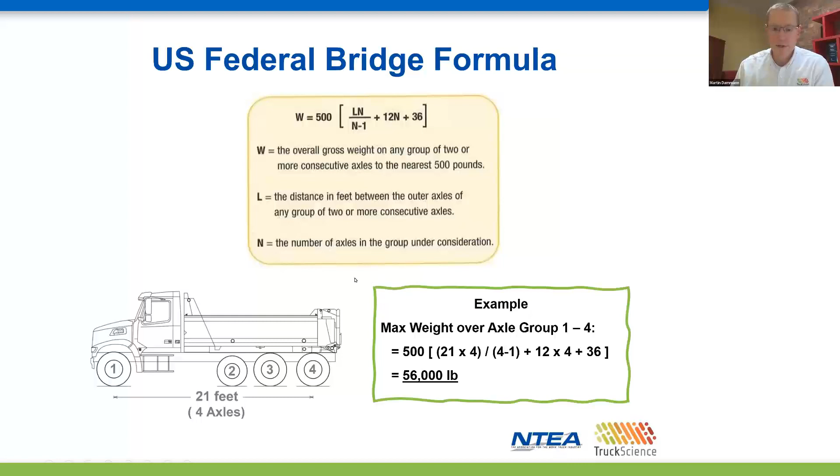Here are 2 exceptions to the bridge formula. Single axles are limited to 20,000 pounds and tandem axles to 34,000. Some states allow higher grandfathered weight limits on their state roads and even on their interstate highway system. We'll show you some examples of this for the states of Georgia and South Carolina later on.

The bridge laws are summarized into what's known as the bridge table. This table combines the bridge formula and most of the exceptions into a simple lookup matrix. If we take our previous example of 4 axles spread over 21 feet, we get that same limit of 56,000 pounds without having to do the calculations.

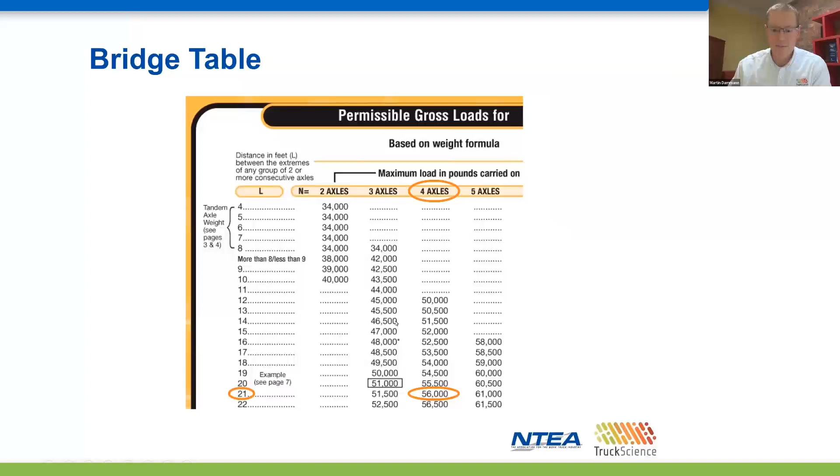To demonstrate the process of modifying a vehicle, we'll take you through a live demo using our axle weight calculator. We'll start with a 6x4 chassis and a 16-foot dump body. Then we'll add a pusher axle and compare the overall carrying capacity. Next, we'll extend the wheelbase by 3 feet to demonstrate how distance affects overall bridge carrying capacity. And finally, we'll add a second pusher and a longer body to optimize the configuration. Let's switch to the live demo now.

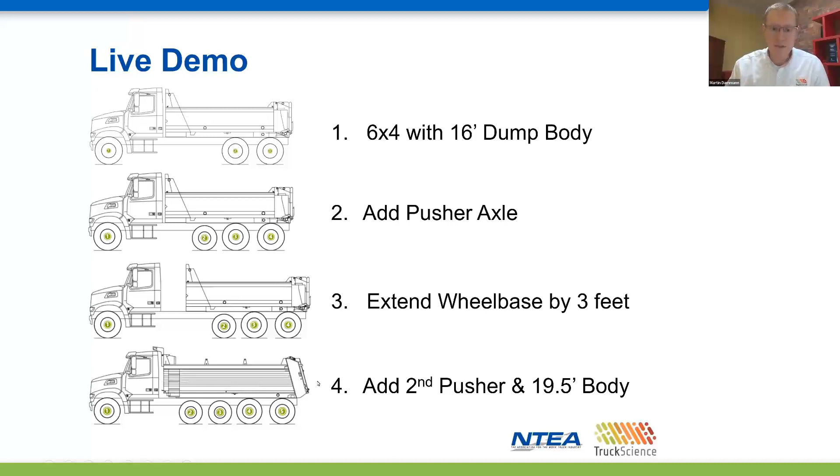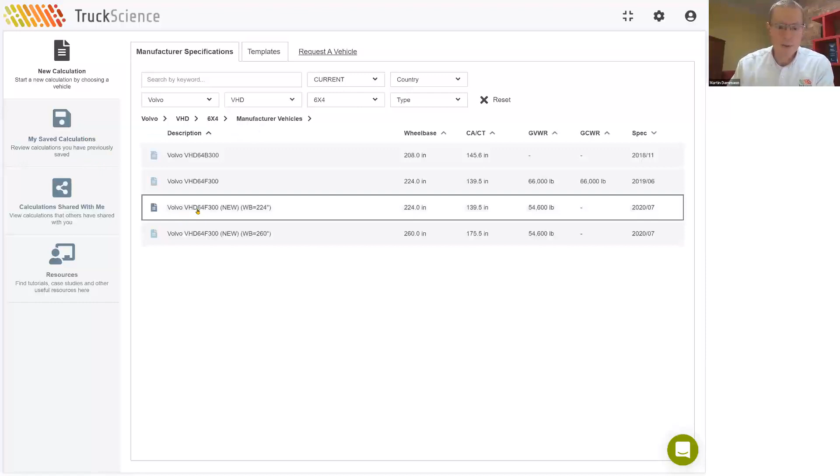In the previous webinar of this series, we focused on sourcing the information to do a weight distribution. Today, we'll take advantage of the vehicles that are already in our library, and we'll select a Volvo VHD 6x4, and we'll choose the one with the set forward axle and the 224-inch wheelbase. The vehicle will open with the graphic and the dimensions and also the weights as per the proposal document from the dealer.

Note that we also show a dashboard to the left here, where we highlight our 3 pillars of compliance, namely manufacturer rating, regulatory compliance, and organization standards. So we validate the calculation against these 3 compliance options here. There's even an area here to display some favorite measurements, and we'll have a look at the dashboard from time to time as we go through the calculation.

Let's just drill down on the regulatory compliance. You'll see that we are validating this calculation against the US federal common size and weight regulations. These regulations contain the bridge formula that we've just discussed, and also the common dimension limits that are applied in most states.

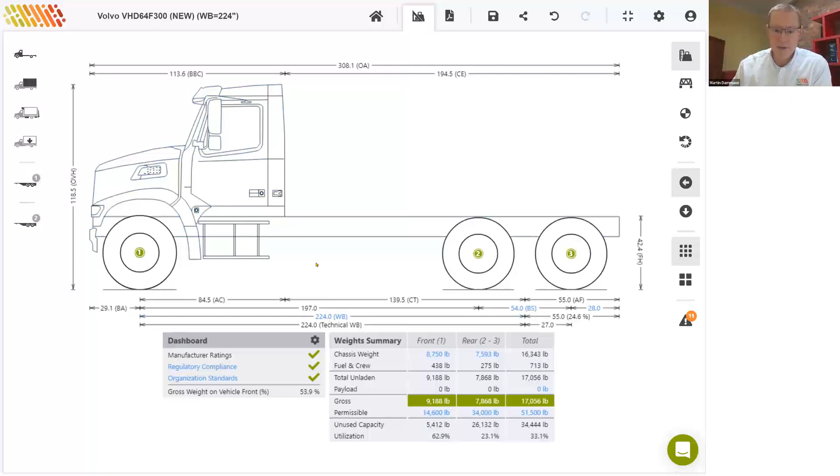Now, before adding the body to our vehicle, it's always a good idea to check some attributes of the vehicle, especially with a Class 8 vehicle, as the manufacturers offer these vehicles with many different wheelbase options and also a lot of different axle options. So we can start off by changing any dimensions that are highlighted in blue, for example, the wheelbase. So if we wanted to override the wheelbase, we could increase it or decrease it to whichever wheelbase we need.

And then in the weights table, we can click on, for example, chassis weight front axle and override that, increase that if we wanted to. If we deselect the override, the value will return to the original default value. You can also change the gross axle weight rating here.

So that depends on the choice of axle. The same applies to the rear axle. Jens, do you have a question there?

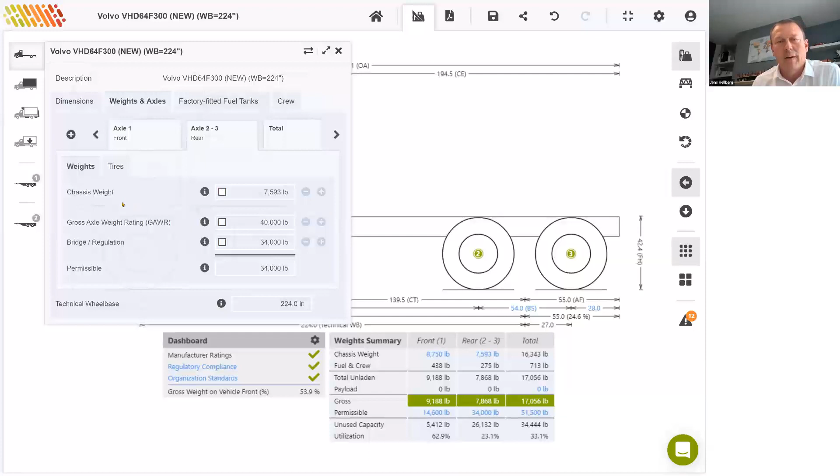Yeah, Martin, just while you're on the front and the rear axle limits, a question came through there: how are weight distributions regulated in terms of max weight on front axle or rear axle? So I suppose maybe if you can just explain a bit more about the GAWR and the bridge. I suppose you've maybe partially answered that question already, but yeah, sure.

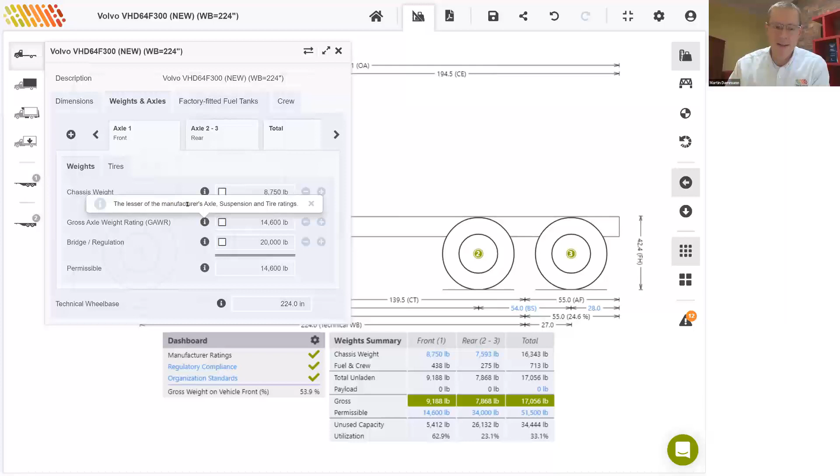Maybe I'll just go back to our front axle here. So we validate. Okay, we'll actually get to that in more detail as soon as we add the body. But I might just go back to the gross axle weight rating. So we have an information icon here to explain what that is. So that's the lesser of manufacturer's axle, suspension, and tire rating.

And then we also have the bridge limit here of 20,000. So for the axle, we have those two items that we compare. And the lesser of these two, that's the manufacturer rating and the bridge limit, becomes the overall permissible. But I'll keep coming back to the validation as we go through the calculation.

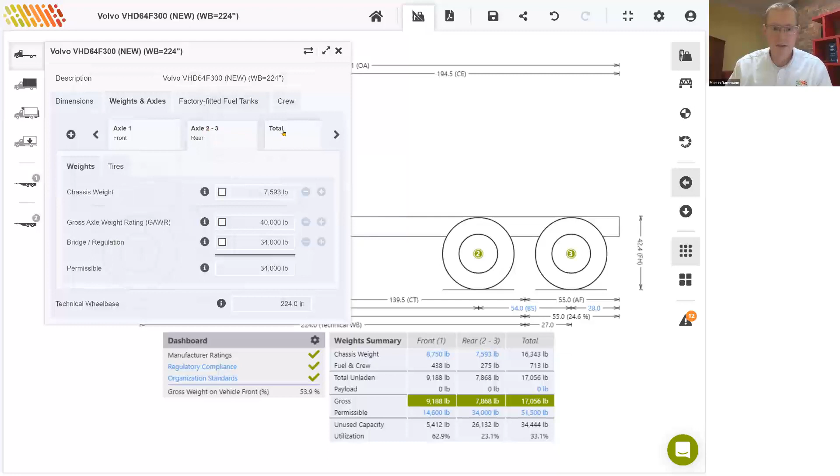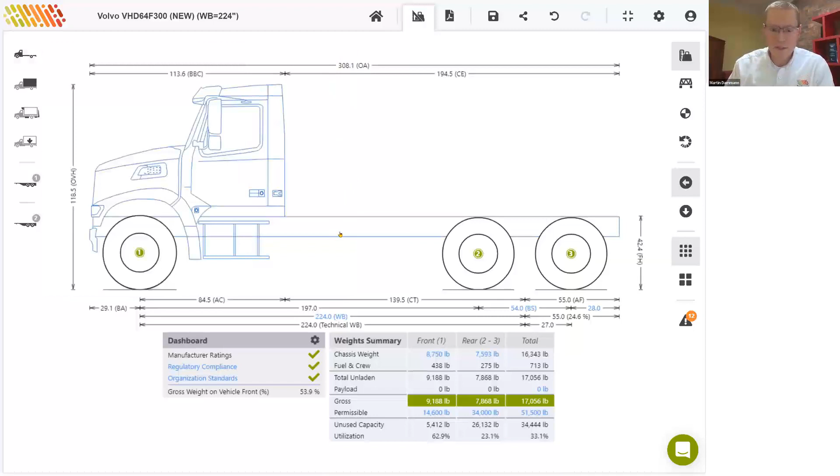Okay, so we can obviously update any of these values on the rear axle as well. And don't forget to change the gross vehicle weight rating under total if you need to make a change there. Let's close that for now. Once the vehicle is set up, we can add the body. We'll do this from the body menu on the left.

These are the different body types that we cater for. For our example, we'll use a dump body. There are different ways in which you can add a body. You can choose it from the public library, or you can use a template to add a generic graphic of a body, which you can then alter to suit your requirement. You can even use the DXF import feature. In the previous webinar, we already demonstrated that DXF import feature.

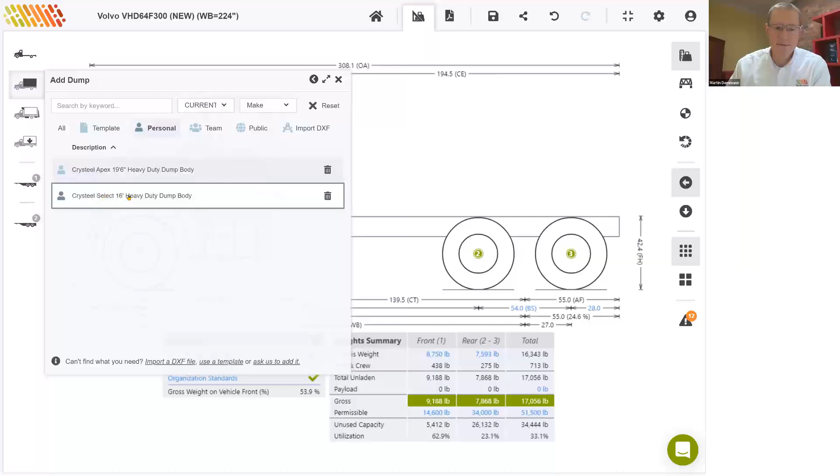So for today, I've actually saved two bodies to my personal library using the DXF import feature. And we'll start with the Crysteel 16-foot body. Okay, we'll add that to the chassis. Let's drag that back slightly to create a clearance between the back of the cab and the body. Note that the body weight of 5,500 pounds in this case does not include the hoist.

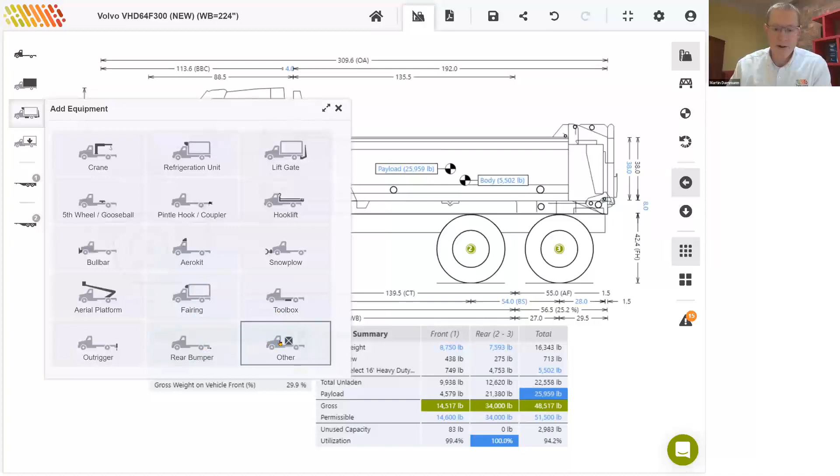To add the hoist, I'll select the equipment menu and other. So we don't have hoist as a specific category here, so anything that's not categorized will fall under other. And I've already used the template feature to add a hoist to my personal library. So I can select that and drag it into position. Let's just drag that back slightly.

All right, so now that we've got the body and the hoist on there, the software will automatically calculate the maximum payload that this vehicle can carry. So you'll see right now that's just over 23,000 pounds. That's also shown in the weights table. And the limiting factor is highlighted.

So if you look to the bottom left here under utilization, you'll notice that the front axle is utilized to 100%. So that becomes our limiting factor here. Unused capacity is 0, whereas the rear axle still has almost 2,000 pounds of unused capacity. You can, of course, change the payload if you prefer.

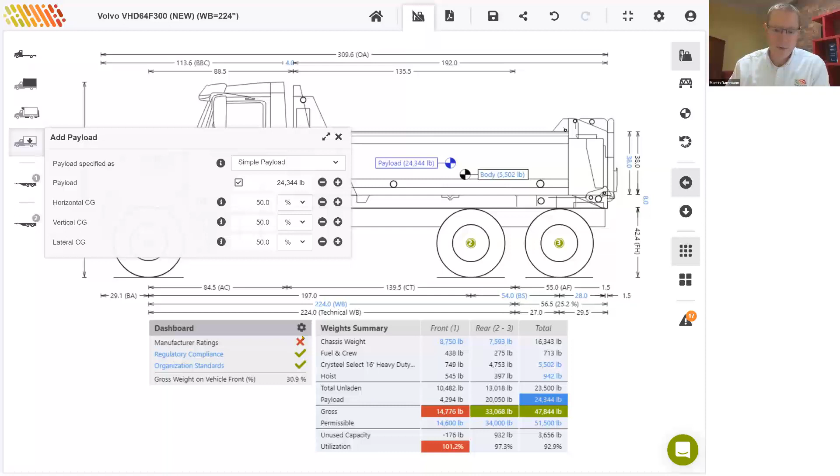So we always calculate the legal payload to give the validation all ticks on the dashboard. However, if we overrode that payload, and let's say we increase that, you'll immediately notice an overload on the front axle, and the dashboard also highlights that as an overload on manufacturer rating. So let's drill down on that again. We can drill down on this permissible here to see exactly how that is triggered.

So you'll notice that the regulatory compliance actually still has a tick, and that's because the bridge limit on the front axle is 20,000. So we're only slightly over 14,000 there, and we are exceeding the gross axle weight rating of 14,600. Okay, so that's just to explain how we do the validation. Let's close this for now, and I'll deselect the override again on the payload because we want to remain within legal, and you'll notice that we get a green tick again for manufacturer rating.

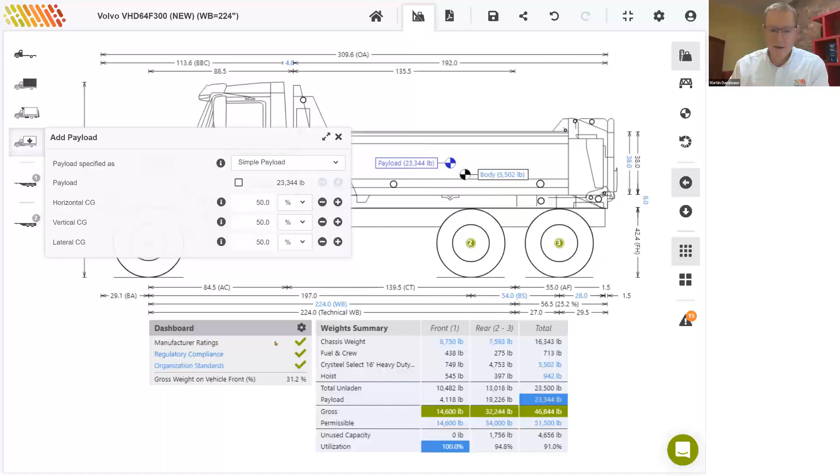Let's see if we can increase our carrying capacity slightly by moving the body back to get a better utilization of the rear axle. To do this, I'll drag the body, and just watch these numbers as I drag the body. You'll notice that the calculations happen in real time as I move the body. So I'll just drag it back slightly until the rear axle becomes the limiting factor, and we have a little bit of unused capacity on the front axle.

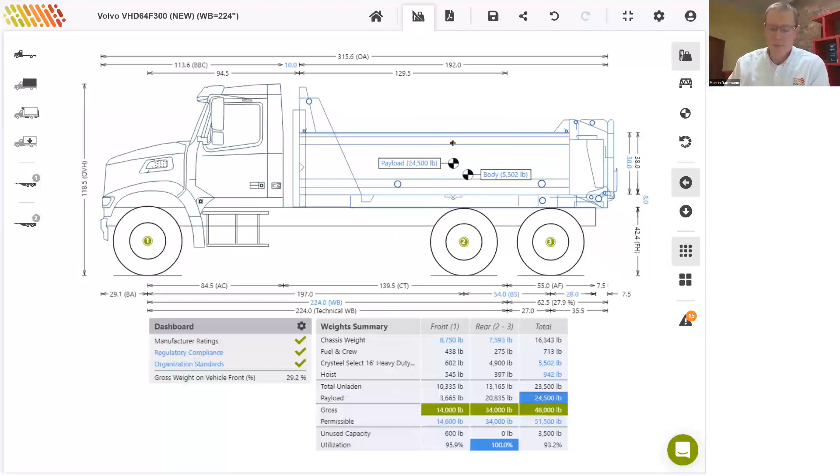So the payload has now increased by slightly over 1,000 pounds. So that's how you can optimize the body position. Let's say for this example, we prefer to keep the body to the front. So I will undo that change to move the body forward again. So at this point, we'll start the process of modifying this vehicle by adding an axle to increase the carrying capacity.

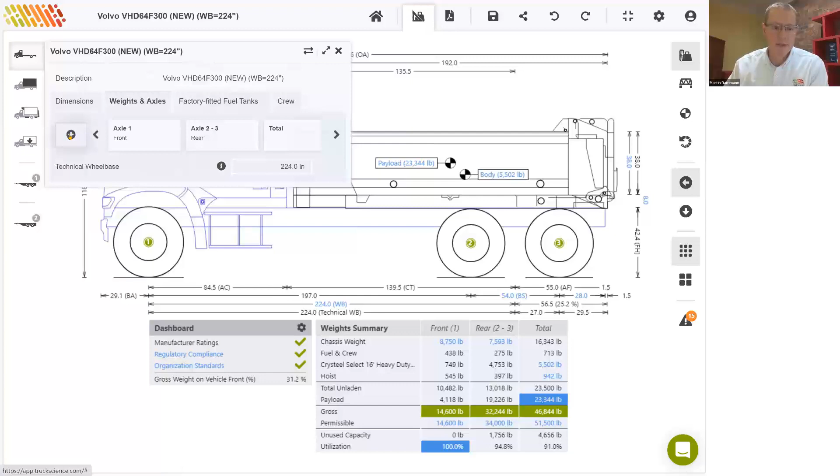Now, in cases where the front axle is the limiting factor, we recommend adding a pusher axle. If the rear axles were the limiting factor, we could add either a pusher or a tag axle. So for this example, we will add a pusher axle, and we'll do that from the vehicle menu, weights and axles. Notice the pulsing plus, and we can click on that to select a pusher axle.

The software will add the pusher axle with some default values, and you can obviously customize those. For example, you might want to change the axle spread, the weight of the axle, the gross axle weight rating, and then even the gross vehicle weight rating. Most manufacturers of Class 8 vehicles will provide a higher gross vehicle weight rating when adding axles. So we'll focus on those three areas, and I'll start off by changing the bogie spread. Let's make that 48 inches.

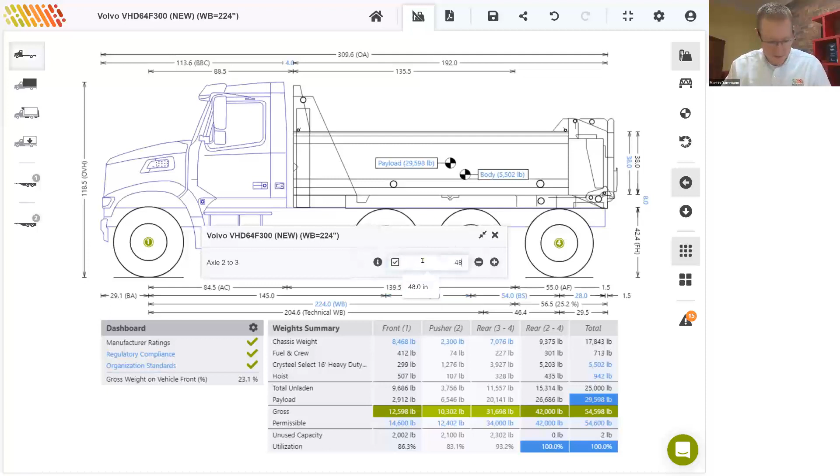And then we can select the pusher axle, actually click on that to open all the attributes that apply to the pusher. We'll start here with the weight. So we have weights, axle, and tires. Let's say the weight of that axle is 1480 pounds with suspension and tires. Then the gross axle weight rating, let's leave that at 13,000.

The bridge limit in this case is slightly over 12,400 pounds. Now you may be expecting a limit of 20,000 here for a single axle. However, this is actually limited by the tire width restriction, and I'll get back to that in a minute when we update the tire size. And then the maximum weight at the bottom, that 13,000, we use that to distribute the weight over the front and the rear. So that's quite an important attribute, and we will come back to this a little bit later.

Let's go to the next tab here for the axle, where we can see that this is a lifting axle. So we can even raise the axle. Let's just try that. If the axle is in the up position, this converts to a normal 6x4. We can drop the axle again, and all the calculations are updated for the axle in the down position. Then tires.

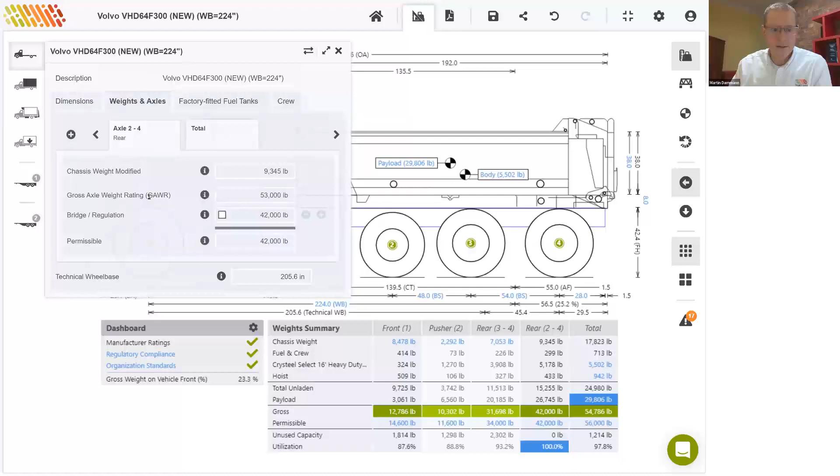The limiting factor is now the tri-axle group at the rear, which is limited to 42,000 pounds. And if we drill down on that, we'll see that the gross axle weight rating is more than sufficient. So we have 53,000 pounds there, 13 on the pusher, and in this case, 40,000 on the driven axles. So it's actually the bridge limit of 42,000 that's the limiting factor.

This will be a good opportunity to have a look at the detailed bridge view, which we have right here. The bridge view provides information for the most important bridge groups. And in this case, the tri-axle group is group 2 to 4. So if you look that up on the table here, 2 to 4, it's 102 inches is the distance. And if we go to the bridge table, 102 inches is 8.5 feet. So if we look that up here, more than 8, less than 9 feet, so it fits into that row, and 3 axles in the group. So the limit is 42,000 pounds. Okay, so that's applied there.

Just a brief overview of all the other groups. So the front axle is limited to 20,000. The pusher, which is axle 2, that we've already discussed, is limited by the tire restriction. And then the driven axles 3 to 4 are limited to 34,000 as per the federal bridge laws. And then the last one we've already discussed earlier on is limited to 56,000 pounds for the overall bridge group. Now the overall bridge group, remember we just had this earlier, we worked with 21 feet.

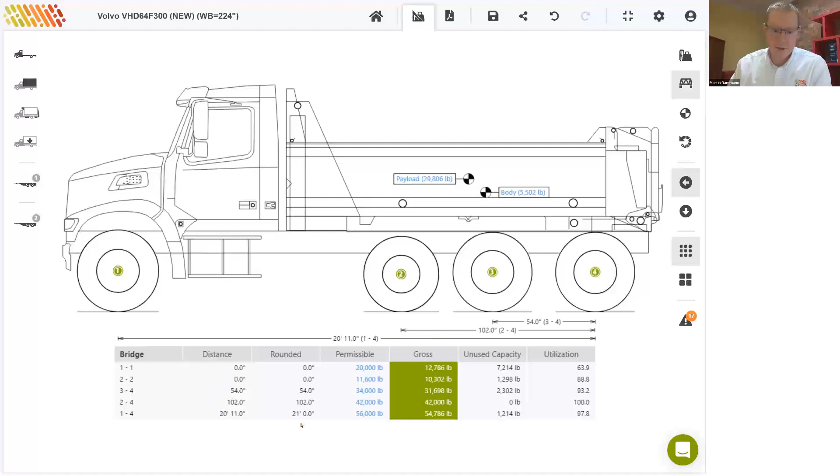The actual dimension is 20 feet and 11 inches, which we round up to the nearest foot, in this case 21 feet. So at halfway, for example, we round up, and less than halfway we round down. So if that was 20 feet and 6 inches, we'd still round that up to 21 feet. And at 20 feet and 5 inches, we'd be rounding that down to 20 feet.

Okay, so let's go back to our summary view and have a look at the detailed calculations that apply now. So what we've achieved in terms of overall bridge carrying capacity is an increase. That was initially 51,500. So that is now increased by 4,500 pounds. And we've increased the payload by about 6,000 pounds.

Now, adding pusher axles does complicate the calculation somewhat. So to have a look at how the weight is distributed over the pusher and the driven axles, we'll go back to the pusher axle and to that maximum weight of 13,000 pounds. So the way we distribute the weight is we use that 13,000 pounds in relation to the gross axle weight rating on the driven axles. And that gives us a ratio of 25 to 75. Therefore, 25% of the 42,000 on all the rear axles will be carried by the pusher and 75% by the driven axles.

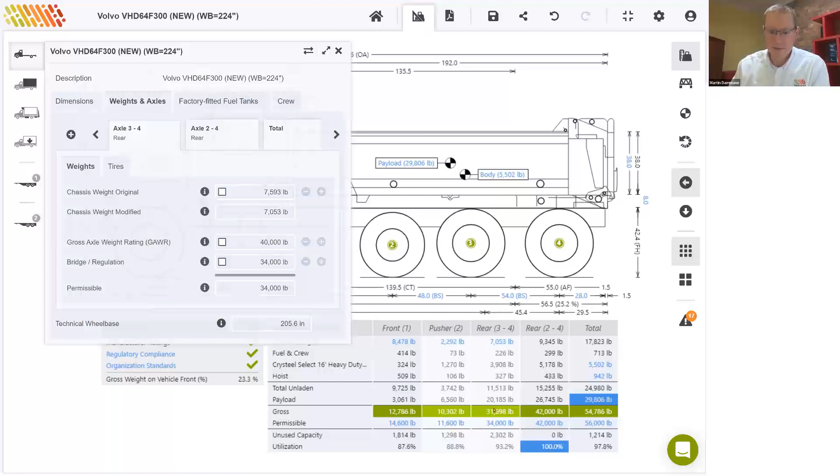We also use that ratio to calculate the new technical wheelbase. Now, the technical wheelbase is used to distribute all the weight between the front and rear axles. So that wheelbase, you'll notice, is different to the specified wheelbase. The specified wheelbase is measured to the center of the driven axles. So the technical wheelbase, in this case, is different. And we also use that technical wheelbase to then redistribute the weight of the body, the hoist, the driver, and the fuel over the front and the rear.

We even use that to recalculate the distribution of the original chassis weight. And to demonstrate this, we have a separate view, and I'll select that. Let's pick the chassis view here, where we start off with the original chassis weight in the 6x4 configuration, front and rear. We take that same weight and simply redistribute it over the front and rear using the new technical wheelbase. So the weight stays the same, it's just distributed differently.

Then we add the pusher axle and total the columns to get the modified chassis weight. Now, we have put together a few slides that show the details of all these calculations, and we'll get back to those towards the end of the presentation. For now, we'll use that modified chassis weight and return to our summary view, where that becomes the chassis weight for this calculation.

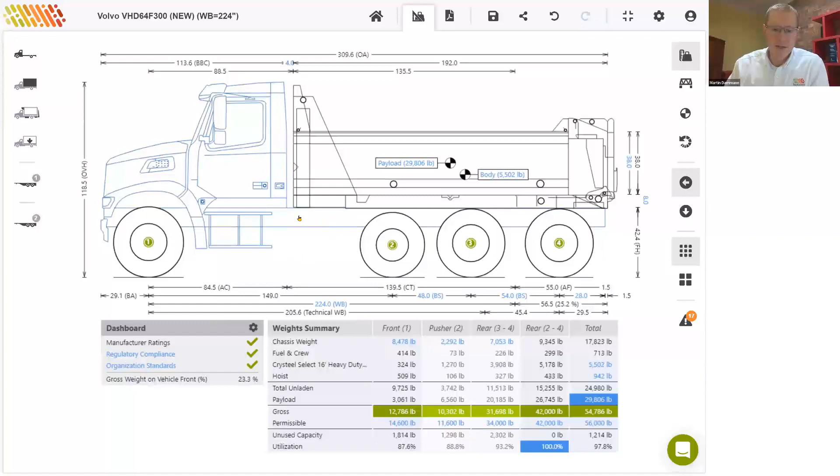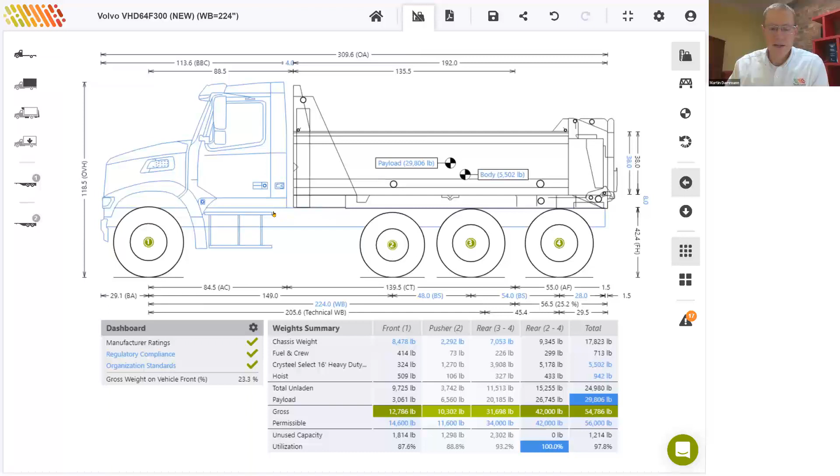All right, it may look like we can add another axle here to optimize this calculation further. So, for example, to assist the rear axle, which is the limiting factor, we could add another pusher axle. However, this space here is probably utilized by some of the vehicle's equipment. For example, the fuel tank, the DEF tank, could be even the battery box or exhaust. So that calculation needs to be done manually to ensure that there's enough space here for another axle.

To demonstrate this graphically, I will add a fuel tank using other equipment, and I'll select that from other, and I'll find a fuel tank here. I'll just search for fuel, and add a 75-gallon fuel tank. Let's drag that down to just behind the steps, just to graphically demonstrate where that fuel tank could be, so that we can see that we actually don't have enough space here for another axle.

We deliberately do not show all this equipment in the default graphic that we provide because of the many options or layout options that the manufacturers specify. So this fuel tank could be behind the steps. There are different sizes of fuel tanks. So there are too many different layouts of all this equipment for us to cover all those scenarios in the graphic that we have. But you can use other equipment, even the DXF import feature, to add as many equipment items as you like.

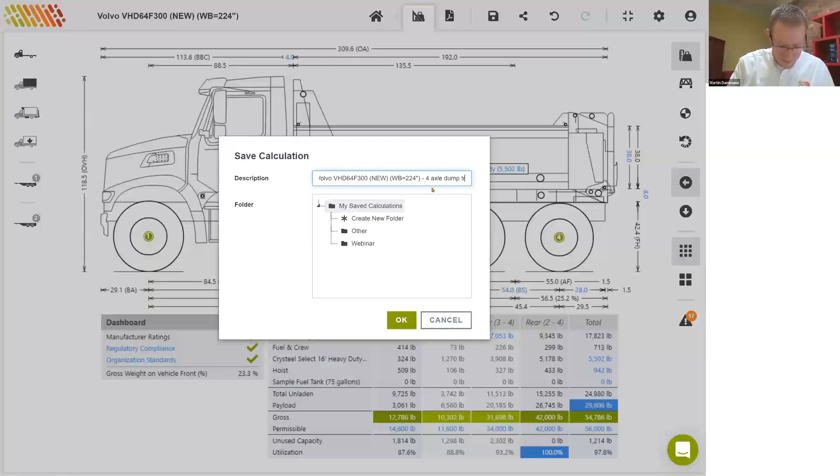All right, now it's obvious that we can't add that pusher axle and that we'd have to increase the wheelbase before we have enough chassis space here to add another axle. But before I do that, I will save this calculation. And let's save this as a 4-axle dump truck, because we'll come back to this calculation to demonstrate the state regulations.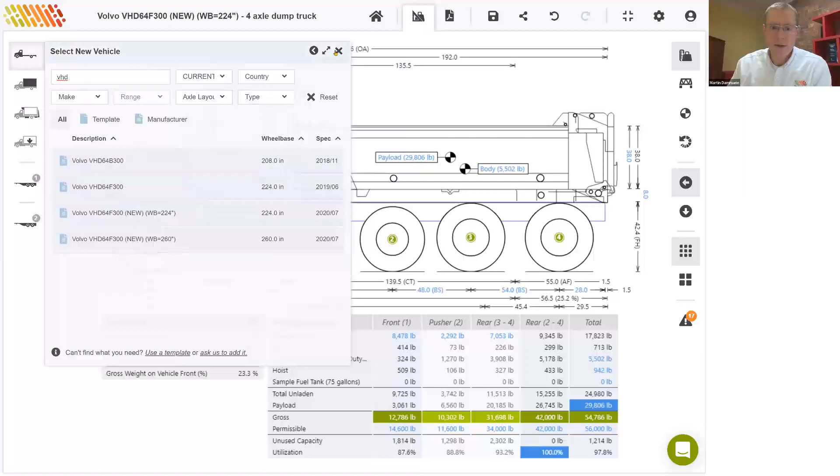All right, but for now, let's increase the wheelbase. There are two ways in which we can do that. We can either change the wheelbase manually and then update the chassis weight front and rear, or we can swap out the vehicle. So under the vehicle menu, we have a swap vehicle feature where we can search for another Volvo VHD. If we already have an option for a more suitable wheelbase in the library, you could select that. But in some cases, we will not have all the different wheelbase options in the library. So for this example, we'll do this change manually.

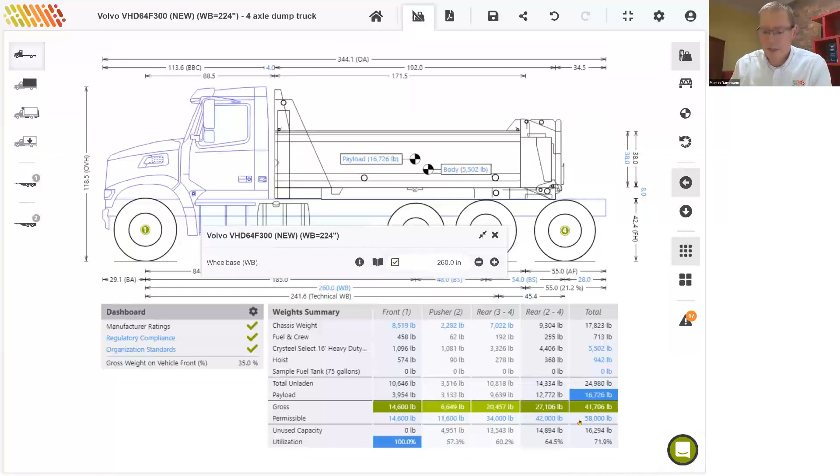So we'll start off on the wheelbase and we'll increase that by 3 feet to 260 inches. Notice as soon as I apply that change, there'll be an update here to the total or overall bridge. So the overall bridge increases from 56,000 to 58,000. So an extra 2,000 pounds for that extra distance.

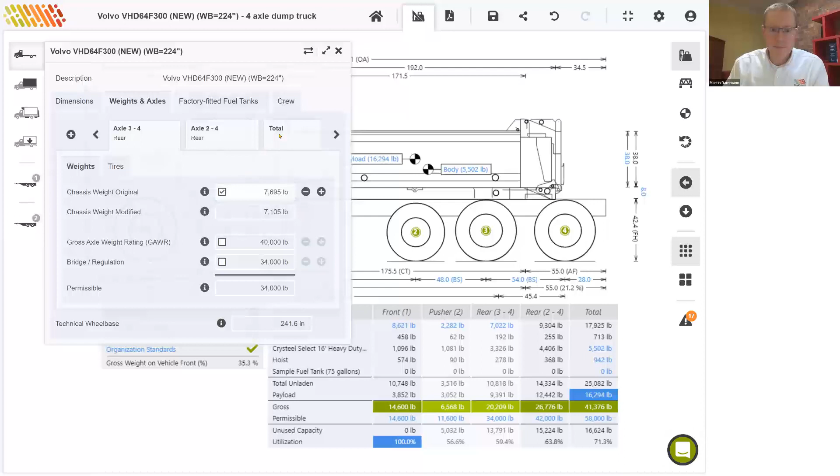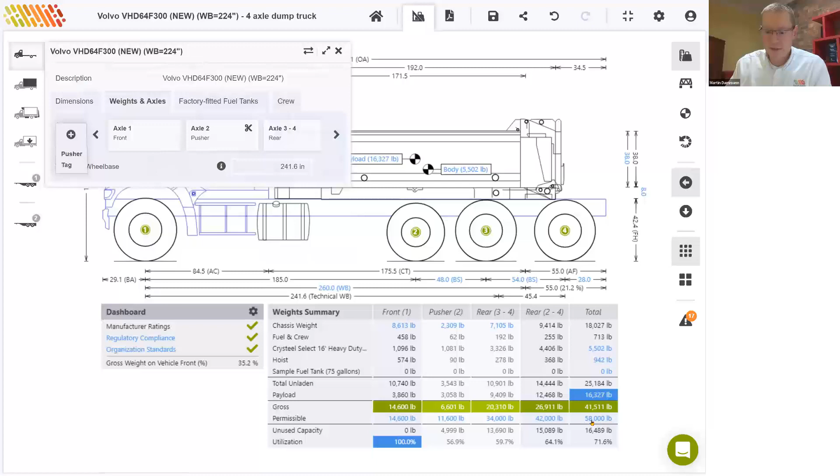Okay, now we have the space for the axle. So let's add that. And again, we'll just monitor what happens to the overall bridge carrying capacity when we add that pusher axle. So it increases from 58,000 pounds to 63,000 pounds. So that's an increase of 5,000 pounds, which is considerably more than we got out of stretching the wheelbase. So adding axles is most certainly the most effective way of increasing bridge carrying capacity.

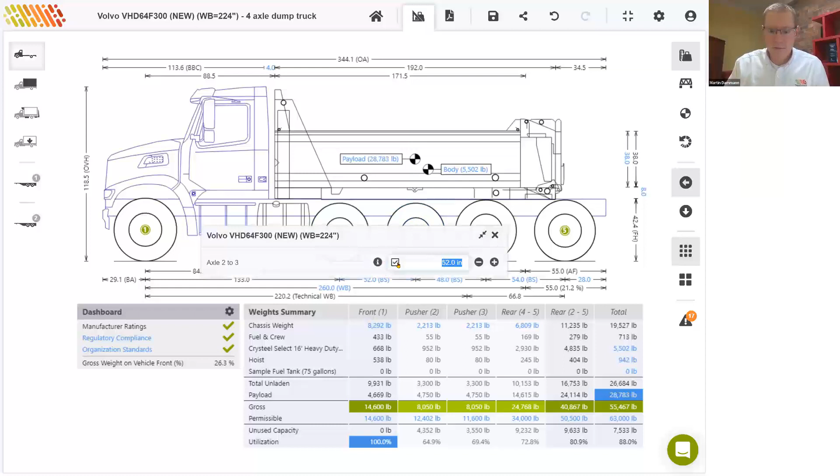We can now make the same changes to this pusher axle as we did for the first one. So we'll start off by changing the bogie spread to 48 inches, and we'll update the weight of that axle to 1480.

And we'll leave it as a lifting axle, and the tire width will also be 11.6 inches. Okay, so that applies the required changes for the second pusher. Gross vehicle weight rating: we just drill down on total again. The gross vehicle weight rating, remember, is still 67,600, which is more than the bridge limit. So there's no need to increase that any further.

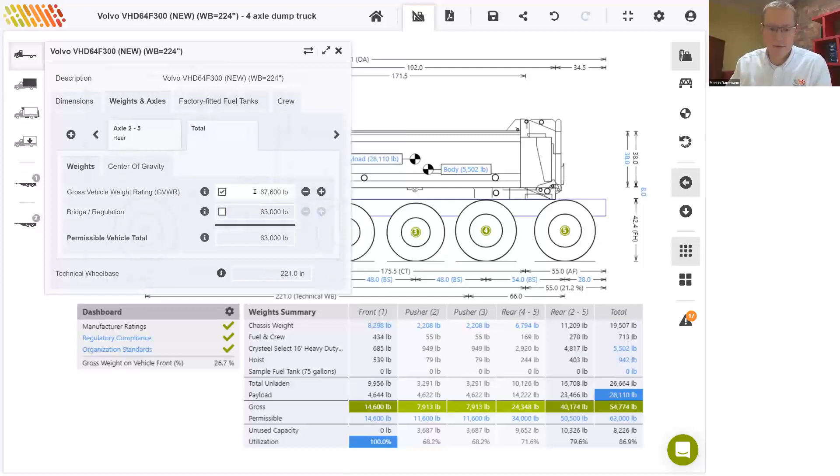Okay. We can also move the body back to make this a little bit more practical. So let me move that to the rear, and I'll drag the hoist back into position. So we can now see that the payload has increased by another 3,000 pounds, from just under 30 to almost 33,000 pounds.

What we do notice now is that we have an error on the dashboard. So our validation is currently failing on the organization standards. We drill down on that, and we'll see that the validation is failing on gross weight on vehicle front percentage. So we've set up a limit here that requires at least 20% of the total vehicle weight to be on the front axle. And in this case, it's only 15.1%.

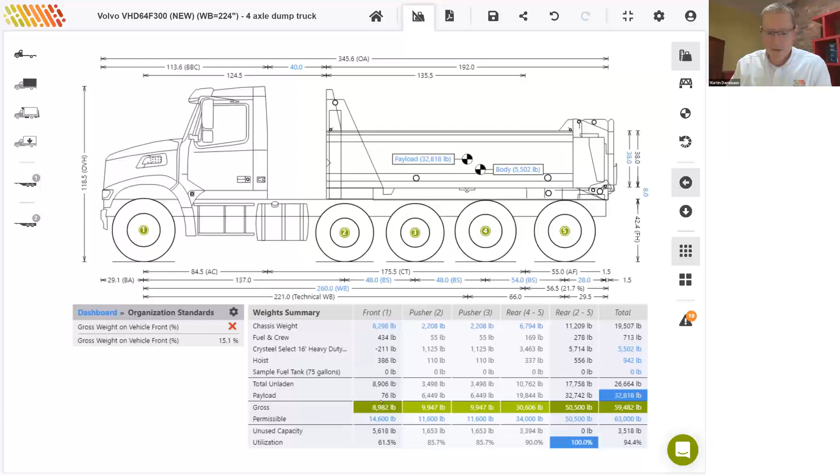We can even see that the front axle is quite light at only 9,000 pounds out of 14,600. So there's almost 6,000 pounds of unused capacity here, and that axle is only utilized to about 60%. So to correct that, we need to shift the payload further forward to get more weight onto the front axle. To do that, we'll add a longer body.

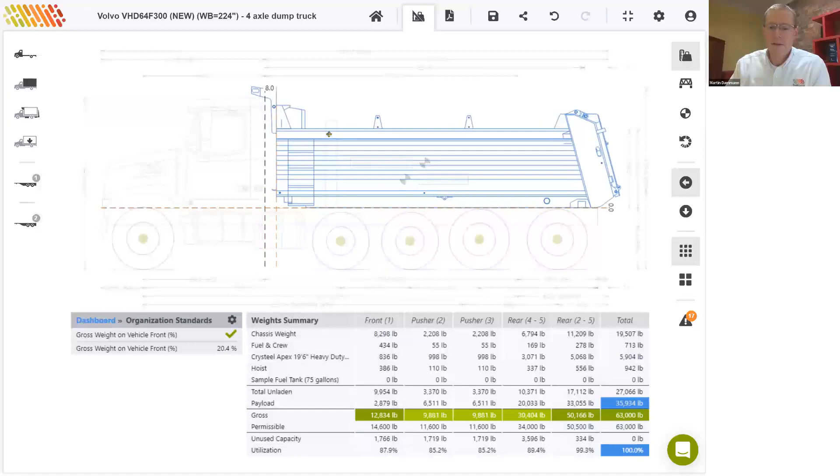So let's remove this body and go back to our dump bodies and choose a 19.5 foot steel body. Let's drag that back, create a clearance, and move the hoist back into position. Okay, so now we've transferred more weight to the front axle, and we're now achieving slightly over 20% on the front axle, which gives us a green tick.

And just to show you where we've set that limit, I'll go to settings, and you'll notice here that we have the gross weight on vehicle front percentage set to a minimum of 20%. So these are your own organizational standards, and you can set your own minimum and maximum values here. We'll come back to this feature when we look at the turning radius calculation in a few minutes, because I still want to show you how the increase in the wheelbase affects the turning radius.

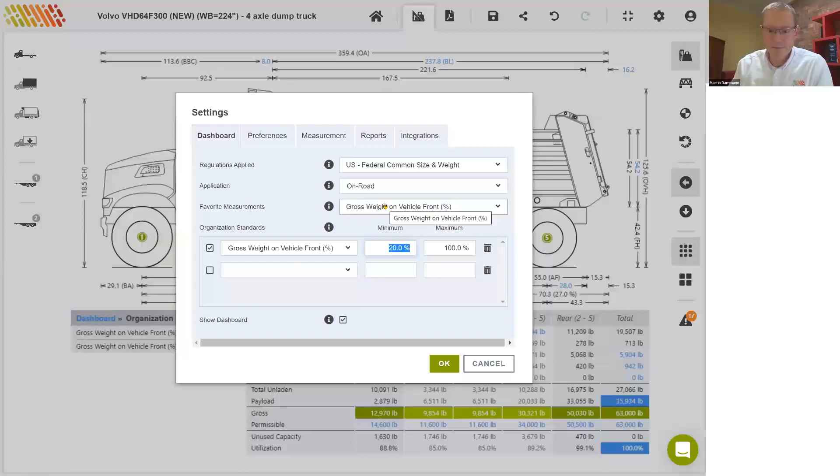Okay, so for now, we've got a green tick again, and we can go back to the dashboard overview, and we have green ticks on all three pillars of compliance. The payload has now increased by a further 3,000 pounds to almost 36,000 pounds, and the overall bridge limit of 63,000 pounds is now the limiting factor. All the axles are very well balanced and utilized at more than 80%. So this calculation is now pretty optimized.

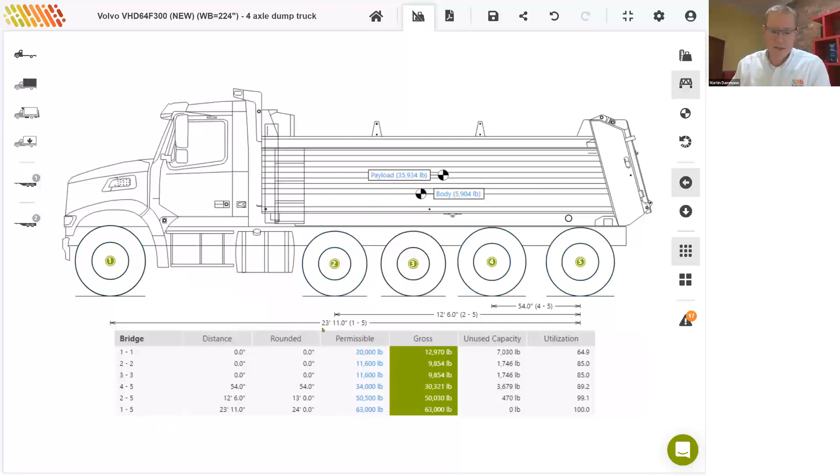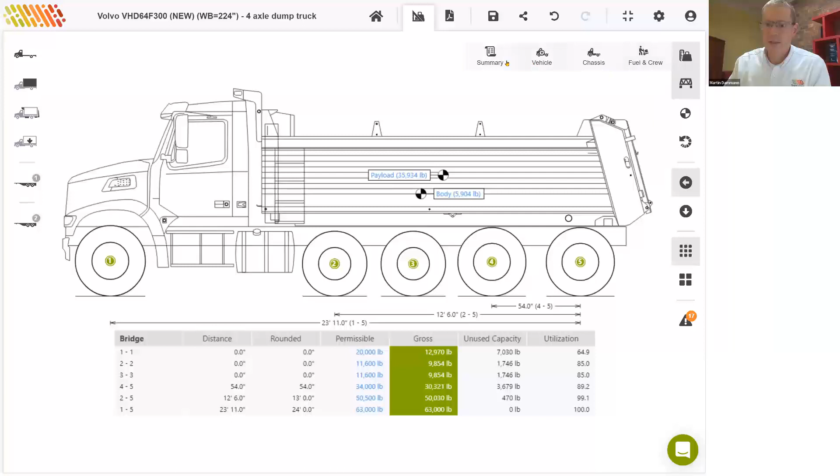You can have a quick look at the bridge view again. Here we'll see that overall limit of 63,000 pounds for group 1 to 5, which has a distance of 23 feet and 11 inches, which we round up to 24 feet. And if we have a quick look again at our bridge table, 24 feet for five axles will give us 63,000 pounds. Okay, this is as far as we'll go in terms of optimizing this calculation.

Just want to check in with Jens there if there are any questions before we go back to the state regulations. Martin, there have been a few questions, but one that maybe you could address is, can you add a tag axle? That's not relevant to this calculation, but if you've finished with this calculation, maybe if there's time, even at the end, just demonstrate a tag axle also. Yes. Okay, we'll do that at the end. So please remind me if I forget, Jens. We can add a tag axle.

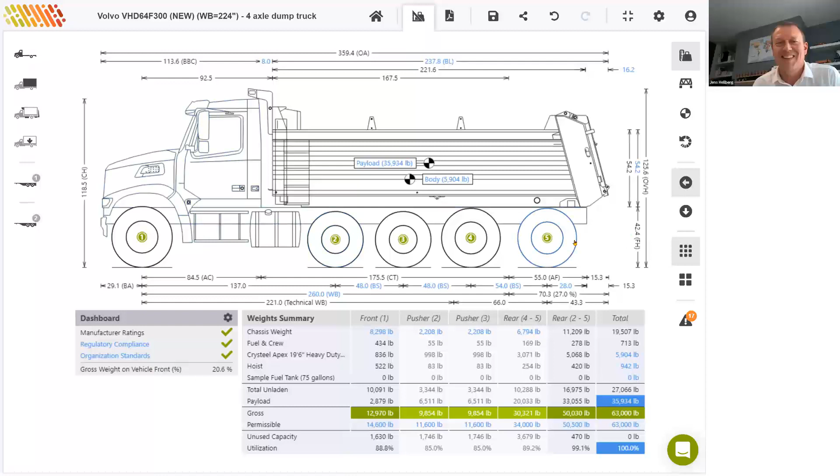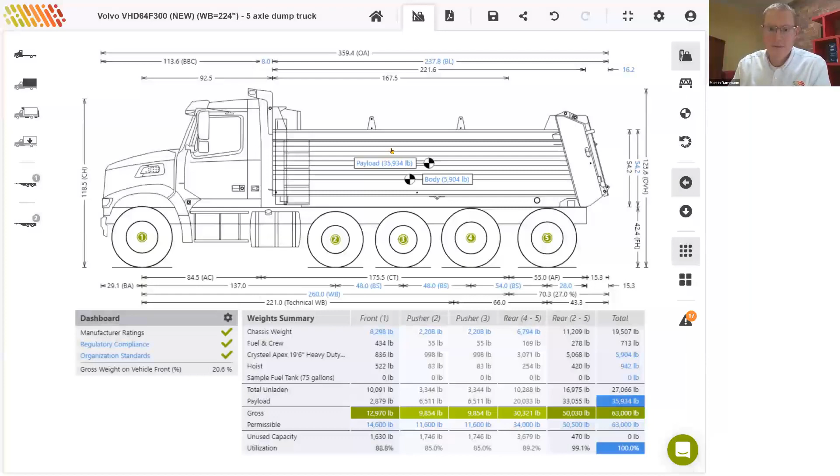Yes. All right. Okay, so for now, we'll go back to our original 4-axle dump truck to run through the state regulations. But I might just save this calculation first. So we'll save this as, and we'll rename this one to a 5-axle dump truck. Then we'll go home and to our saved calculations and open our 4-axle dump truck again.

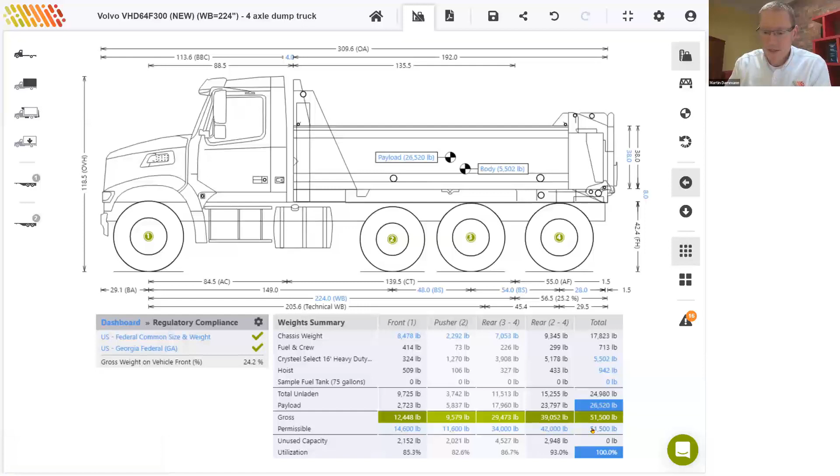Remember, this calculation is currently only being validated against the US Federal Common Size and Weight regulations. So let's see what happens if we add the regulations for Georgia. To do this, we can click on settings here, and then under regulations applied, we can search for Georgia and include those. And as soon as I apply these regulations, notice what will happen to our overall bridge carrying capacity of 56,000 pounds. So that reduces by about 4,500 pounds to 51,500, and our payload also reduced by about 3,000 pounds.

The reason for that is that the authorities in Georgia do not recognize lifting pusher axles in the overall bridge group. So they would see this as a 6x4 vehicle and only consider 3 axles when it comes to the bridge group, hence the 51,500 limit.

Let's say we wanted to carry 29,800 pounds of payload anyway. We can change that manually just to see what happens on the dashboard. You'll notice that will give us a red cross next to Georgia, whilst the federal regulations still have a green tick. So we always apply the lowest value in terms of the permissible on our summary weights table, but we do still validate each regulation individually and show which ones are legal and which ones are not.

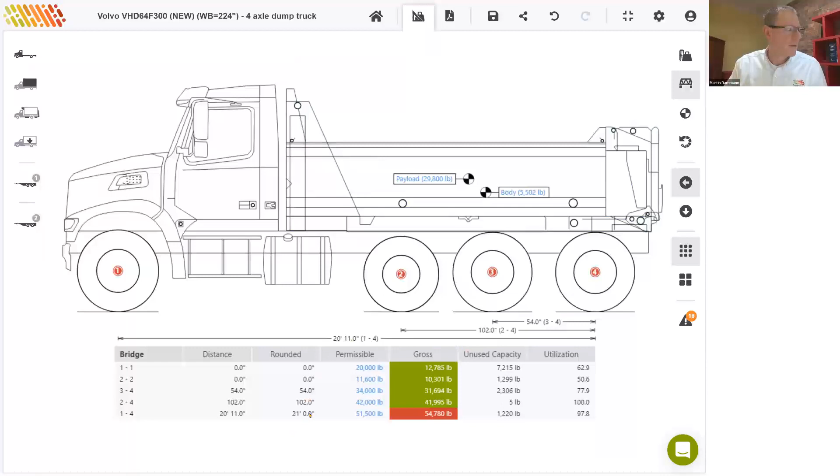So if we drill down on Georgia a little bit further, we'll see that that restriction is limited to bridge, and the restriction is, as I mentioned, because Georgia is only seeing this as 3 axles. So if we just go back to our bridge table again, in our bridge view, we'll see the overall bridge group is 21 feet. And 21 feet, but now only recognizing 3 axles, gives us 51,500 pounds.

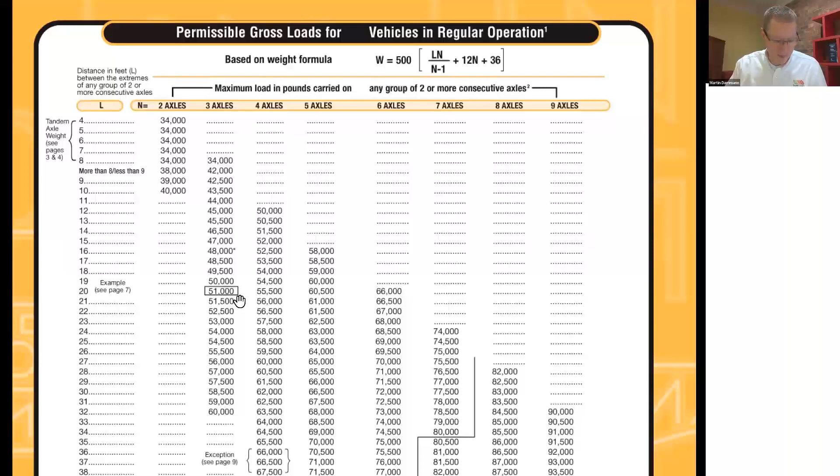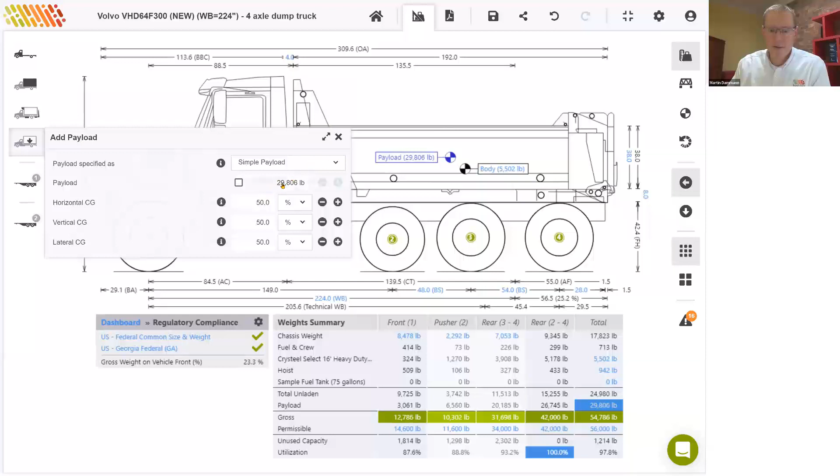Okay. There's an easy way to overcome this problem, and that is to lock down the pusher axle. So what we'll do, and I might just drill down on those regulations again, I'll then open the pusher axle, go to the axle tab and deselect the lifting axle option. That'll lock down that axle and increase that carrying capacity back to 56,000 pounds and maximize the payload again. So if we deselect the override on the payload, we'll get back to that maximum of 29,806. And we've still got green ticks for both regulations.

Okay, so now let's see what happens if we only have the regulations for Georgia, to see if Georgia has any grandfathered higher weight limits. To do this, we will remove the federal regulations. So under our regulations under settings, we can deselect the federal regulations and keep an eye on the pusher limit and the driven axle limits when I click on OK. So those limits actually increase slightly. So the pusher axle goes up to 13,000, which is the gross axle weight rating, and the driven axle went up from 34 to 40,000.

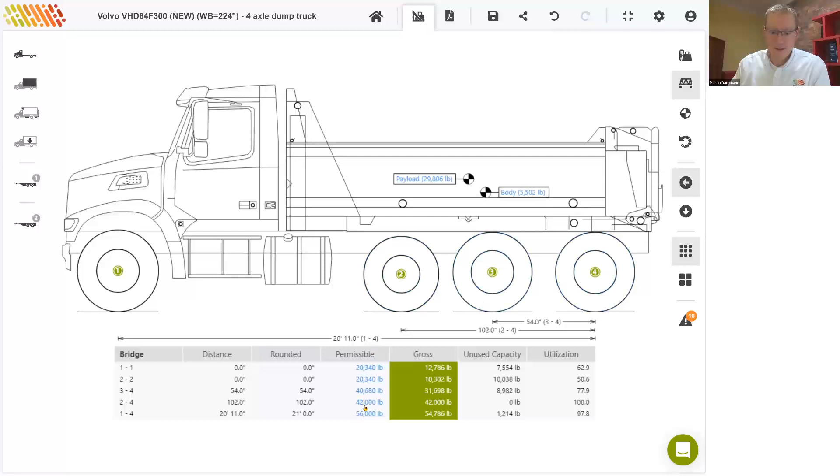Now, the reason the pusher axle went up is because Georgia does not impose that tire width restriction. So that 500 pounds per inch of tire width does not apply in Georgia on rear axles. And on driven axles, Georgia allows a much higher rating. We can even go to the bridge view to get a better overview of Georgia's higher limits. We'll see on the front axle, we actually have even more than 20,000, so 20,340. That same limit applies to the pusher, so it's treated as a single axle. The driven axles are limited to 40,680, so quite a bit more than the 34,000 from the federal bridge laws. And then the tri-axle group and the overall is the same. So there Georgia does use the federal bridge laws.

Okay, we'll go back to our summary view. And we'll add another regulation here. So let's add the regulations for the state of South Carolina. So assuming this vehicle may need to cross state lines, we'll add South Carolina, and again, keep an eye on the tandem axle group, which now reduces to 35,200. So because we're applying the lowest value here, South Carolina has a limit of 35,200, which is interesting because it's also higher than the 34,000 pounds from the federal regulations. But again, South Carolina also does not impose the tire width restriction on the pusher here. So that remains at 13,000, which is the gross axle weight rating.

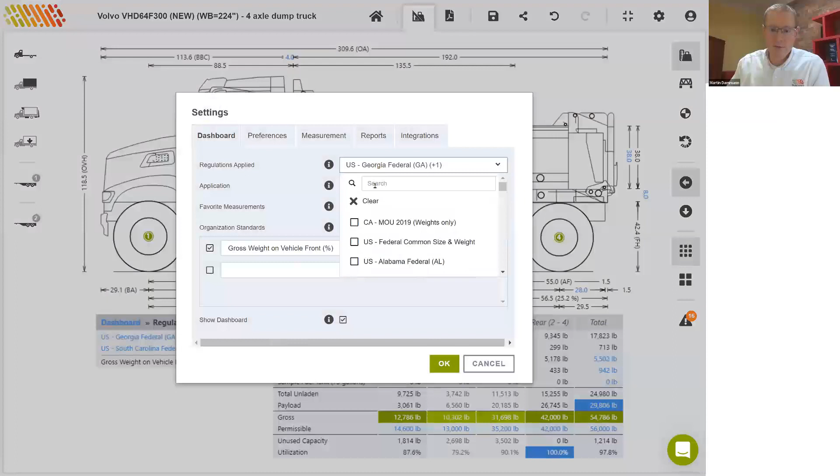We'll add one more state here, and we'll add the state of Washington, which has some interesting variations. And again, when I click on OK, just watch the tandem axle group. That'll drop to 34,000, and the pusher axle also dropped slightly back to our original 11,600. So Washington uses the 34,000 for the tandem, and it does impose that tire width restriction on the pusher, which is 500 pounds per inch.

And Washington also has an interesting restriction on the steering axle. Now, the federal regulations do not say anything about a restriction on the steering axle for tire width. However, about half of the states actually do apply a restriction, and it could be 600, 800 pounds. In this case, with Washington, the restriction is 600 pounds per inch of tire width, and therefore we have slightly less than 15,000 pounds here instead of 20,000 pounds.

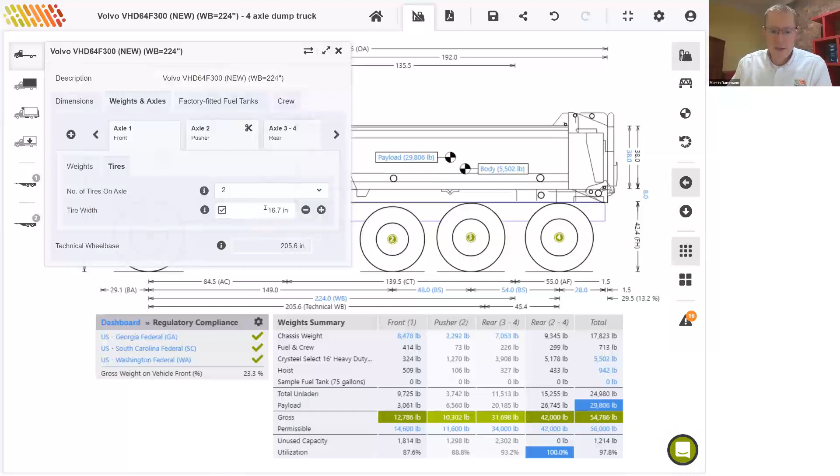So to get the full 20,000 pounds on the steering axle for bridge, we need to increase the width of the tire on the front. And that needs to be increased to at least 16.7 inches. So a typical 425/65 tire would be about that wide. And if we go back to weights, you'll now see that the bridge limit has gone up to 20,000.

To take advantage of this higher bridge limit on the front axle, we would need to also increase the gross axle weight rating. So that means stronger axle, suspension, and tire. So now there are actually two sort of tire restrictions here. Under bridge, it's the tire width restriction. And then here for the gross axle weight rating, which also includes the tires, the actual load rating for the tire needs to be sufficient to give us 20,000 pounds. And the 425/65 tires would definitely give us 20,000 pounds here. And that then applies that 20,000 limit to the front axle as well.

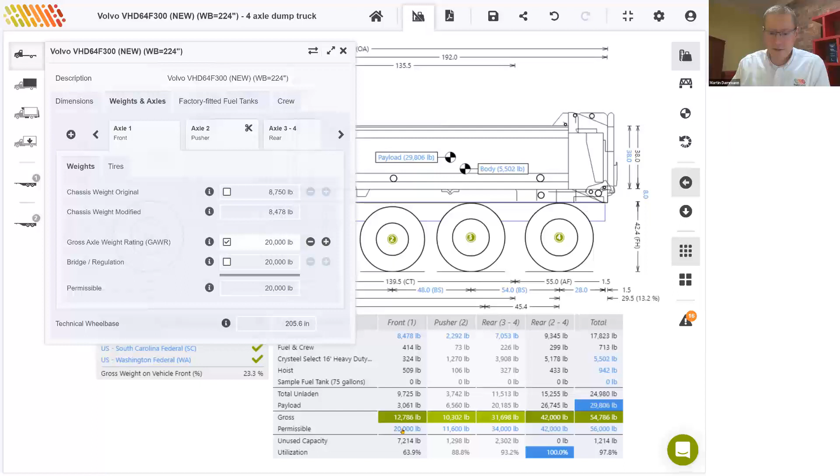All right, now, yes. Martin, I've got an interesting comment here, and I'm just going to pass it straight on to you because my knowledge of Georgia regulations is a bit thin. So the comment is Georgia has adopted the FBF statewide, but still allows trucks to carry weights in accordance with old state laws. Essentially, the FBF only applies to federal roads like interstates, and when the truck weighs between 73,280 and 80,000 pounds, the old laws allow for 4-axle trucks to carry 70,000 pounds, regardless of axle spacing. Strangely, Georgia's state laws do not recognize lift axles. They cannot be used when calculating the maximum allowed weight for the truck. So I am conflicted by the reference Martin shared about a lift axle. Maybe you can comment on that.

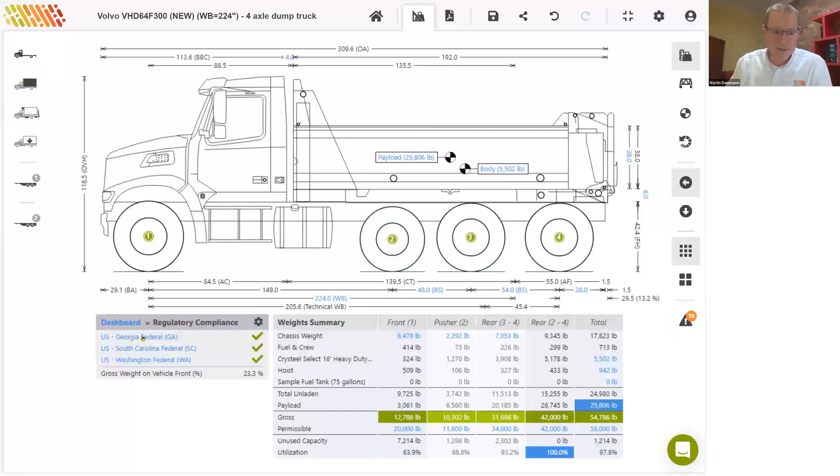Okay, I'll start at the beginning there. Let's just have a look at which roads these regulations apply to. We can see under notes and warnings that the Georgia federal regulations apply to the interstate and national highway system. For South Carolina, they apply to the interstate, and then for Washington, interstate and designated roads. So every state is slightly different. And we are, in fact, busy working on regulations for the state roads only. In the next few weeks, we will notify you when those are released. We'll release those in batches. And then there'll be a regulation, for example, for Georgia state roads only.

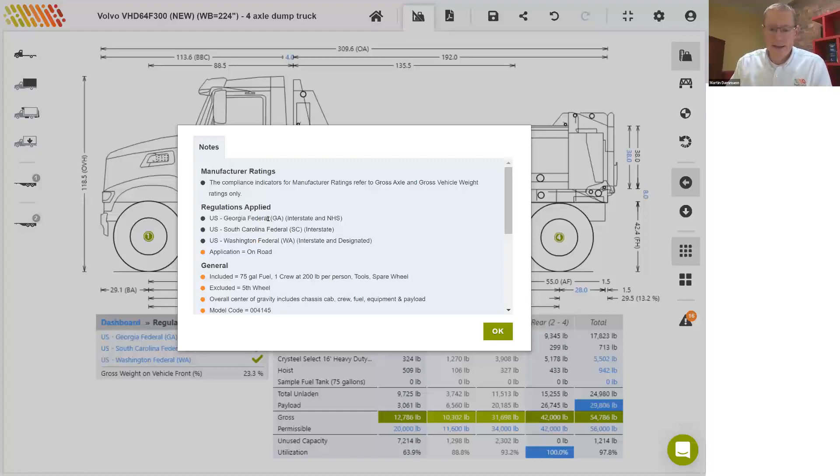And in that case, Georgia will have, as you mentioned, even higher grandfathered weight limits. For example, for garbage trucks, Georgia will allow up to 46,000 pounds on a tandem. So those regulations will come soon and will enhance what we're doing here. And then I might just get back to that comment about the 73,000 pounds. When the total weight is under 73,000 pounds, then you're correct, the federal bridge laws do not apply. And when it's over 73,000 pounds, the federal bridge laws do apply. So states have their own cutoffs below which they either use their own bridge laws or their own limits, until they apply the federal bridge laws.

And maybe what we'll do is, Jens, we've obviously got the details of the person who asked that question. Might just take that offline and go into a little bit more detail on those specifics. Yes, definitely. Maybe we can even set up a demo going through those, if that's agreeable. I'll make a note anyway. Thanks. Okay.

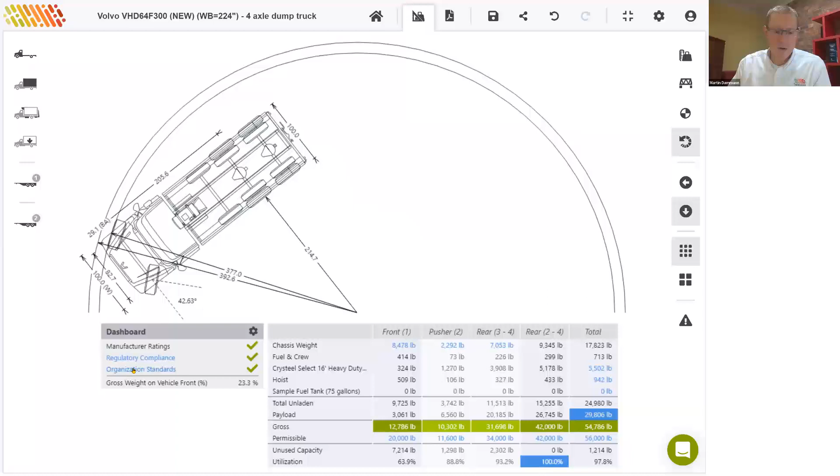So that covers the state regulations. The last feature that we're going to go through is the turning radius. For this, I'll change the view to the smallest turning radius. And on the dashboard, we'll go back to organization standards. Now, the turning radius here for the curb to curb is 377 inches, or slightly over 31 feet.

Let's say we want to add that dimension to our favorite measurements here. Under settings, we can go to favorite measurements and add, and you can see that we've got a long list here of dimensions and weights that can be added as favorite measurements. So we'll add turning radius curb to curb, and let's only do that for now. And you'll notice it throws that dimension out on our dashboard.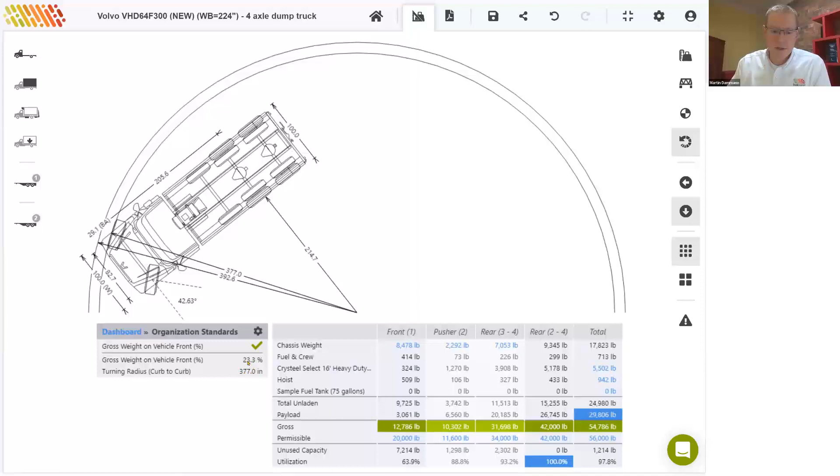The advantage of this is that that dimension will always be visible regardless of the view that we are in. So for example, if we go back to the side view where we can't see the turning radius, it'll still be shown on the dashboard. So that's what favorite measurements are all about.

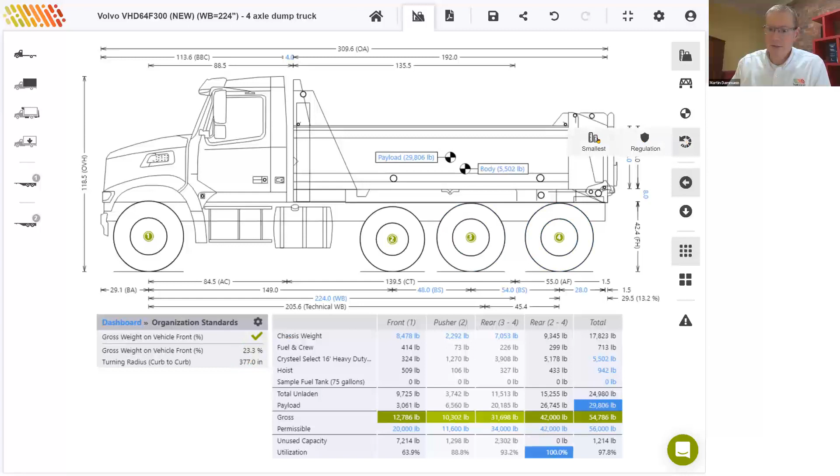Let's go back to turning radius. And let's add a restriction, our own organizational restriction on that. So we do that again from settings. Under organization standards, we can add an additional one here for the turning radius. Okay, the minimum is not important, but we don't want to exceed, let's call it 420 inches, which is 35 feet. So we're setting that as our upper limit.

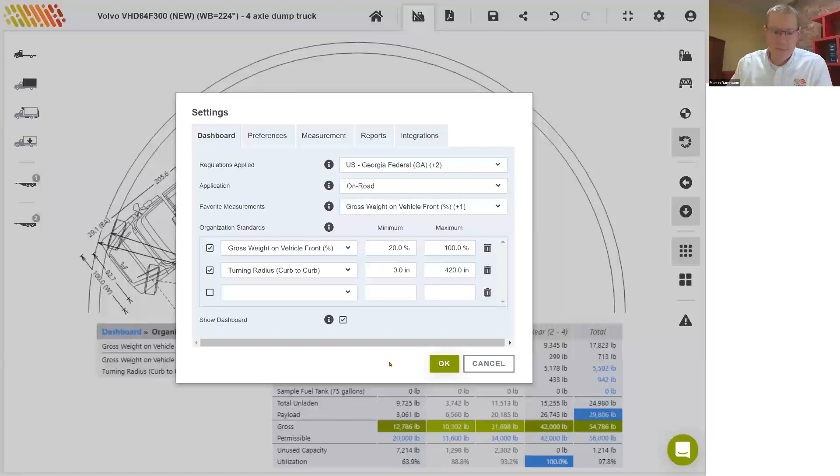So right now we've got a green tick there because we're only at 377, so well below the 420. But let's see what happens when we extend the wheelbase from 224 to 260. And as soon as we apply that change, we'll get a red cross on the validation for curb to curb because we're now slightly over 420 at 429.

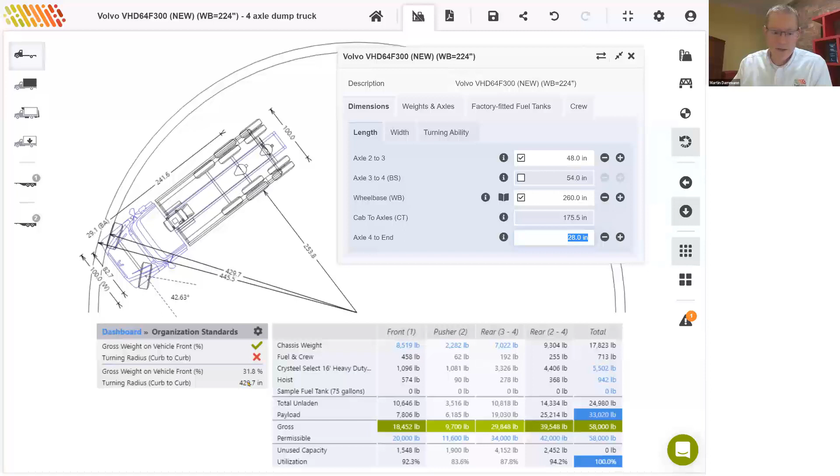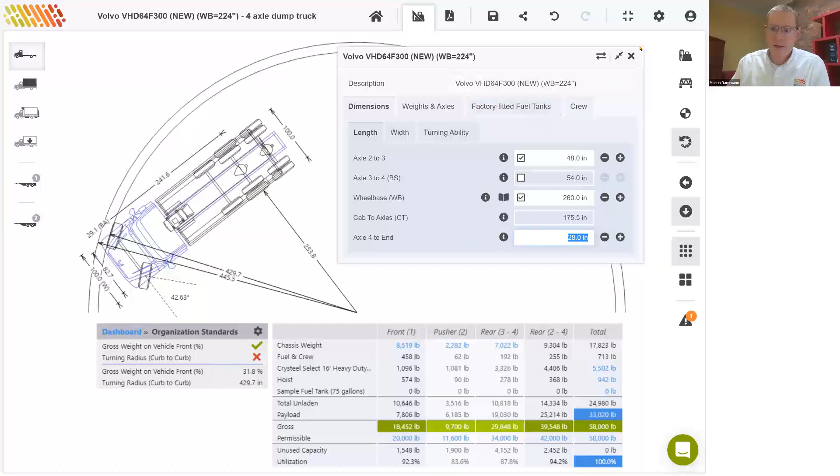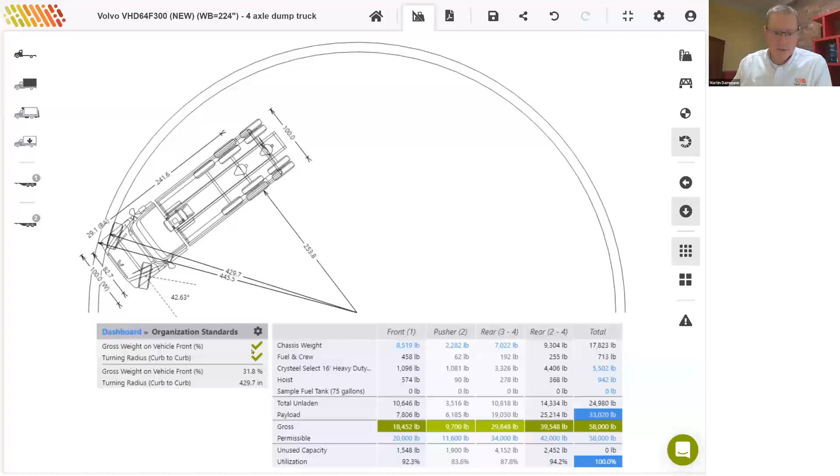But again, this is only your own internal sort of standard, and you could now talk to the customer to establish the exact details of this operation and the route, to maybe establish that we could be a little bit more lenient here and increase that turning radius by, let's say, 1 foot. So let's increase our limit from 420 to 432. And if we apply that, we'll get a green tick again. And if we go back to the dashboard, we'll have a green tick for all our compliance pillars.

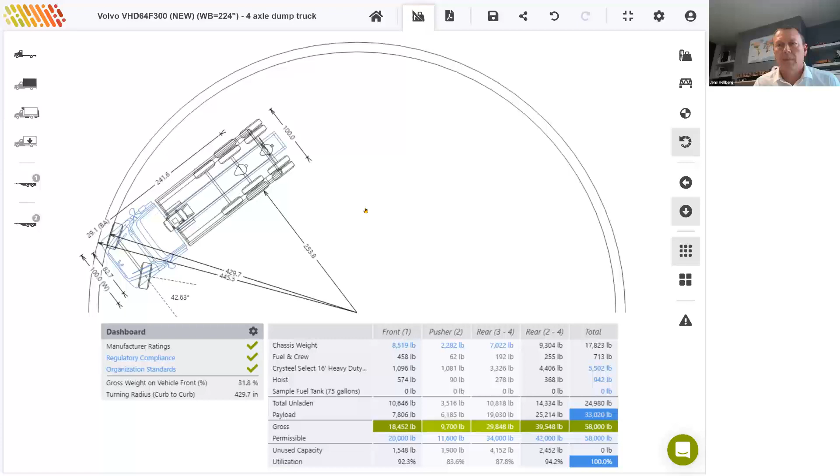All right, Jens, are there any more questions before we go back to the slides? No, I think that's all the questions. Okay. All right, we'll end the live demo here and take you back to the slides.

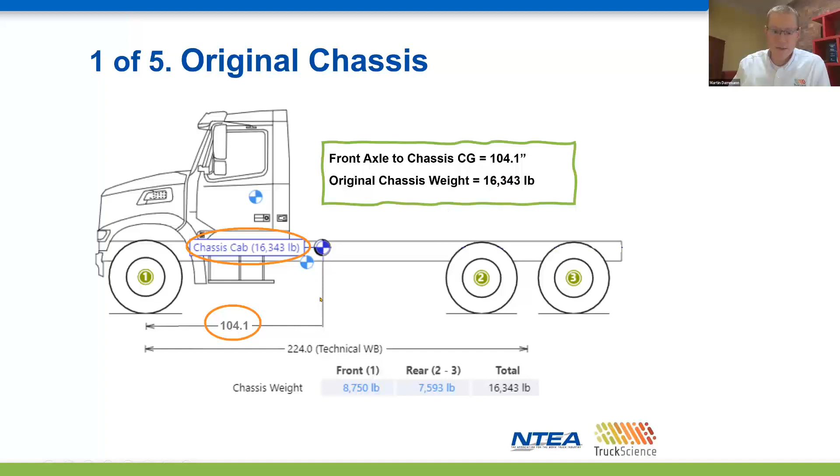Okay, here are the calculations for the modified chassis weight I mentioned early on in the demo. These slides will be included in the recording for you to study in more detail, so I'll go through them quite quickly here. So we start off in step 1 by noting the original chassis weight and the center of gravity from the front axle. Then in step 2, we'll determine the ratio between the pusher and the driven axle. Remember, we use the maximum weight of 13,000 on the pusher and the gross axle weight rating of 40,000 on the driven to determine that ratio of 25 to 75%.

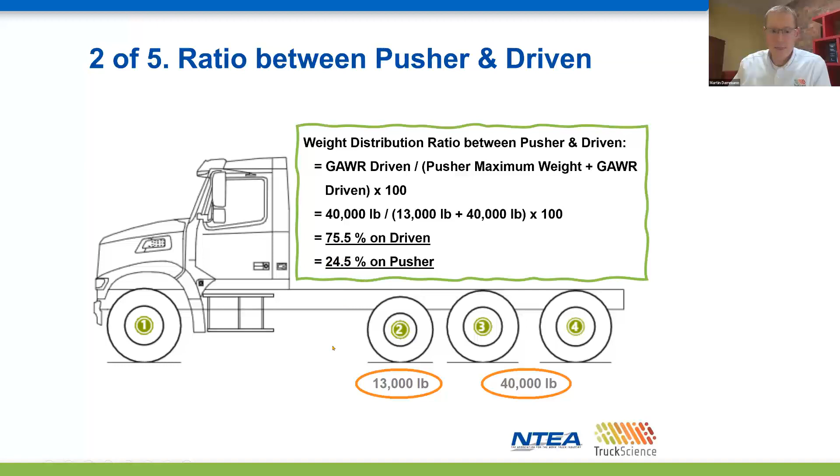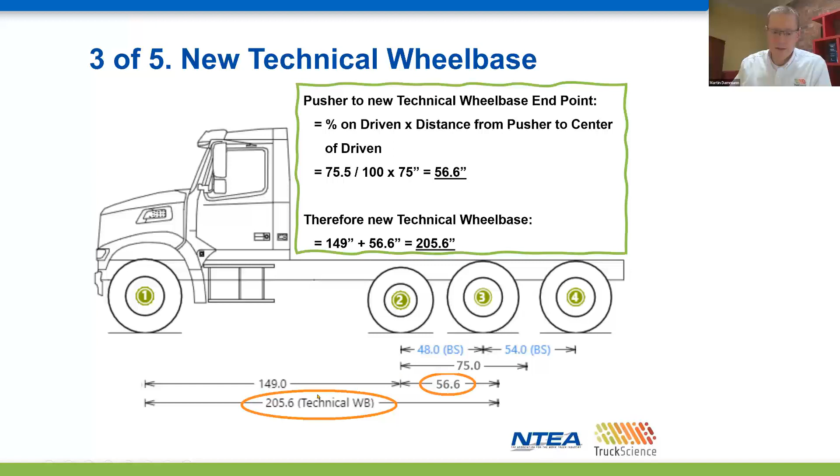Next, we'll use the ratio from the previous step to calculate the new technical wheelbase. Remember, the technical wheelbase is used to distribute the weight over the front and rear axles. And this wheelbase will be different to the specified wheelbase in this case. Then in step 4, we use the new technical wheelbase to recalculate the original chassis weight over the front and rear. Note that the actual total of chassis weight remains the same. It's only distributed slightly differently over the front and rear.

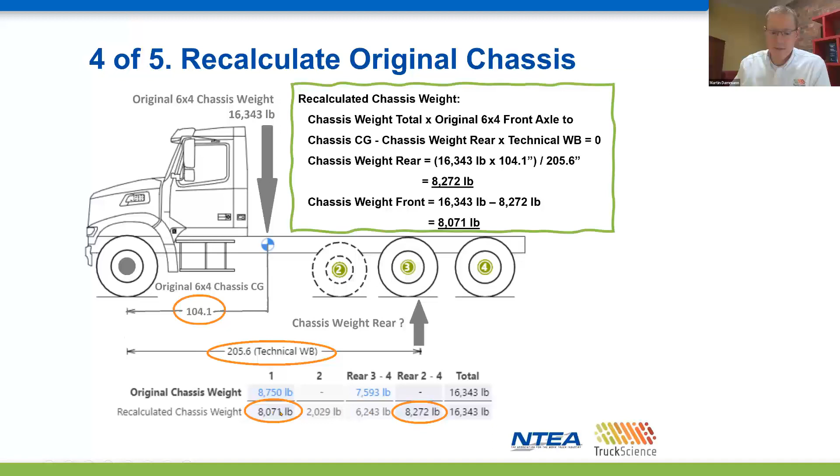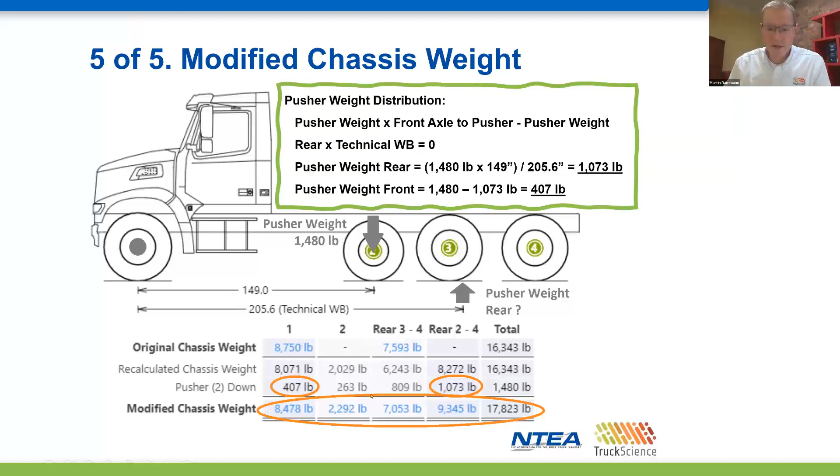And then in the last step, we add the pusher axle and total the columns to get the modified chassis weight, which matches the example we had in the live demo. Please feel free to get in touch with us if you have any questions about these calculations.